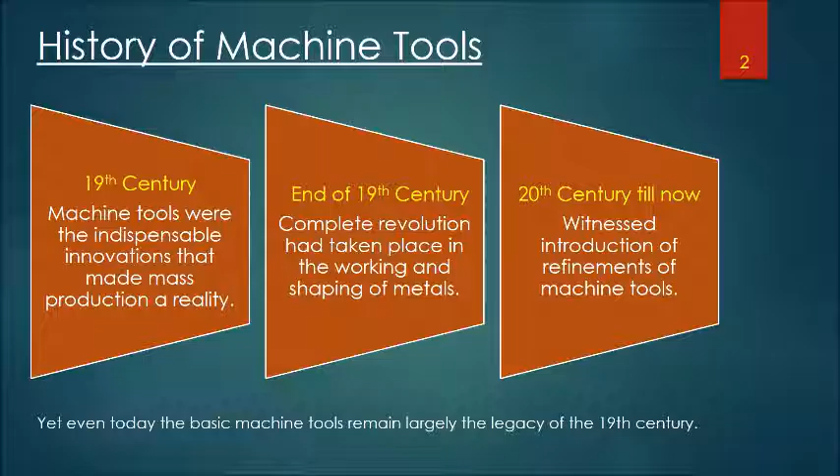In the 19th century, machine tools were the indispensable innovations that made mass production a reality the way it is right now. By the end of the 19th century, a complete revolution had taken place in the working and shaping of these metals. From the end of the 19th century through the 20th century until now, we have witnessed refinement in the industry. Yet even today, the basic machine tool remains largely the legacy of what we had manufactured in the 19th century.

Currently, the best sustainability practices followed in machine tool industries in our country, India. Current scenario: India's machine tool industry is taking steps to improve productivity and sustainability. The Indian machines are price competitive and also hold an edge in flexibility.

The sustainability practice in India is focused on a few points: energy efficiency, capacity enhancement, process optimization, scrap reduction, quality management, emission reduction, safety features incorporation, and work environment improvement.

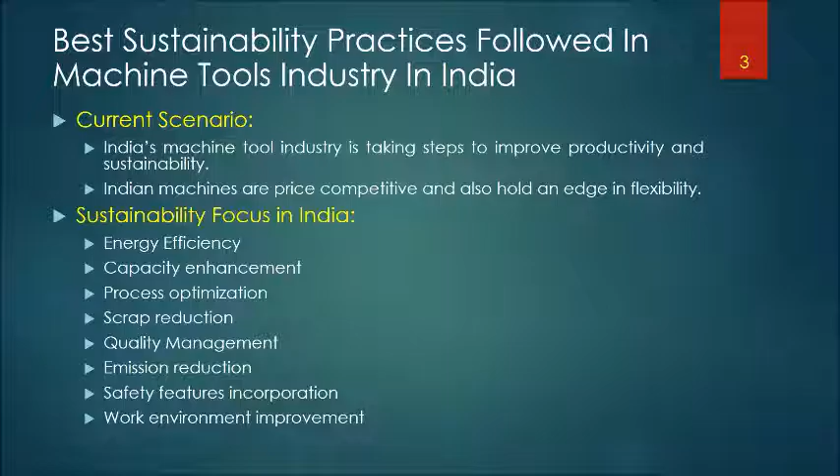So now we move on to the key challenges and the possible improvement points. First, research and development and technology denial. India needs to focus on research to have innovative methods of production and improve aspects of sustainability.

Dependence on import and high import duty: India imports nearly 70% of its demand. So this is an opportunity for India to manufacture these machine tools within its own country.

High interest rates make this industry less competitive. And green manufacturing and sustenance - this aspect has not been implemented in the Indian manufacturing industry.

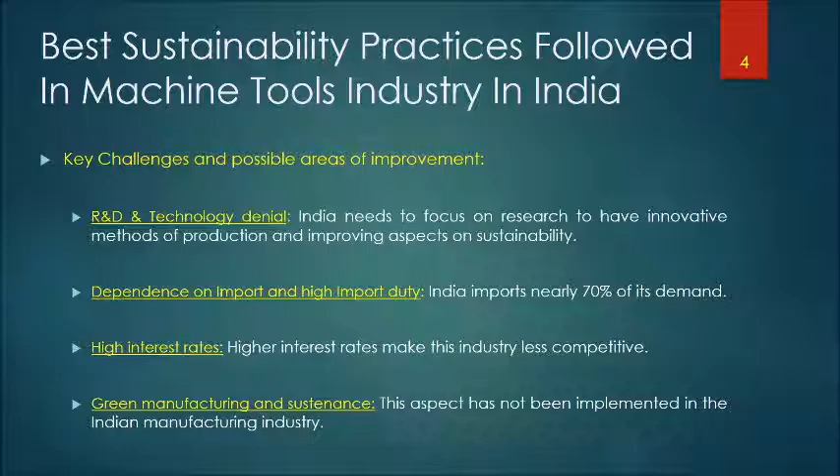Now we will look at best sustainability practices followed in the machine tool industry in India. The Indian Machine Tool Manufacturers Association is concentrating on some exclusive programs for enhancing industry capabilities in the manufacturing sector. In association with the Department of Heavy Industry, Government of India, it has launched two programs to enhance the competitiveness of the Indian machine tool industry.

Firstly, development through the Center of Excellence is an opportunity to develop new technology. The Indian Institute of Technology, Madras, has been identified as the nodal agency for the Center of Excellence in Machine Tool and Production Technology. For projects approved under this program, 80% of the development cost will be incurred by the Center of Excellence, and only 20% cost will be incurred by the industry.

According to this program, which is the Institute Innovation Collaboration Program, the mapping of industries with the R&D facilities available in the institutes will be done together.

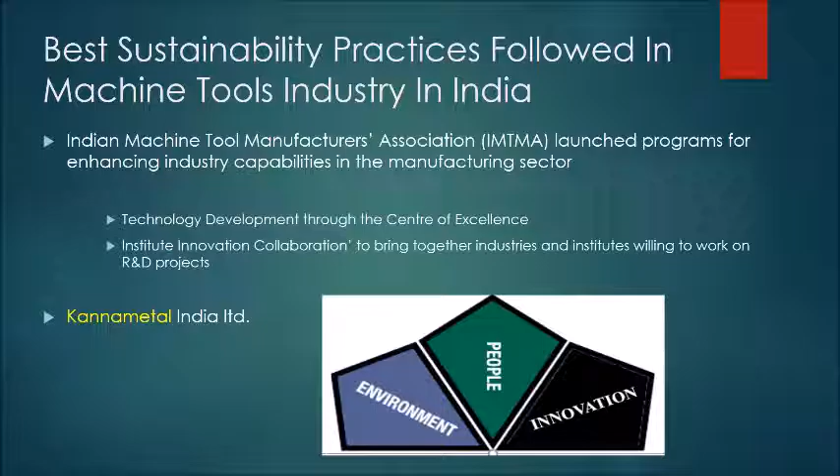The next initiative we will talk about is from the industry perspective. The company Kennametal India Limited, a leading machine tool manufacturer in India, has adopted a framework which includes environment, people and innovation.

Under their environment facet, they have started the Protecting Our Planet initiative, according to which they recognize and reward their employees in the area of energy and water conservation. At this point in time, they have done more than 100 global projects in this area.

Under the people domain, they have started a global management-based safety process, which has increased the safety of their distribution centers and manufacturing employees up to 100%.

The next area is innovation. Innovative companies such as Kennametal focus on the percentage of revenue from new products, and Kennametal has benchmarked its revenue from new products up to 40%.

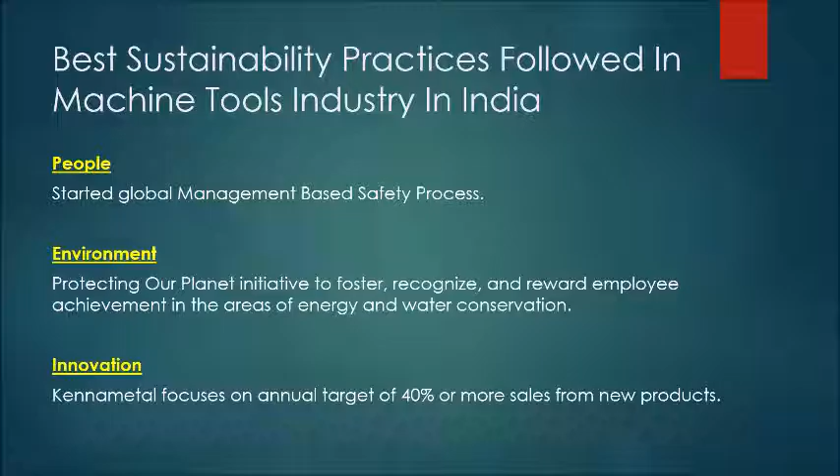Now from this slide, we'll talk about the best sustainability practices that are followed by machine tool industries across different geographies. First, we'll concentrate on Europe. In Europe, there is a project called Design MTS, where all the machine tool industries share best practices, and it is available for public use for all industries. The best energy efficient techniques are shared, giving all industries a chance to follow this technology and become more energy efficient and sustainable.

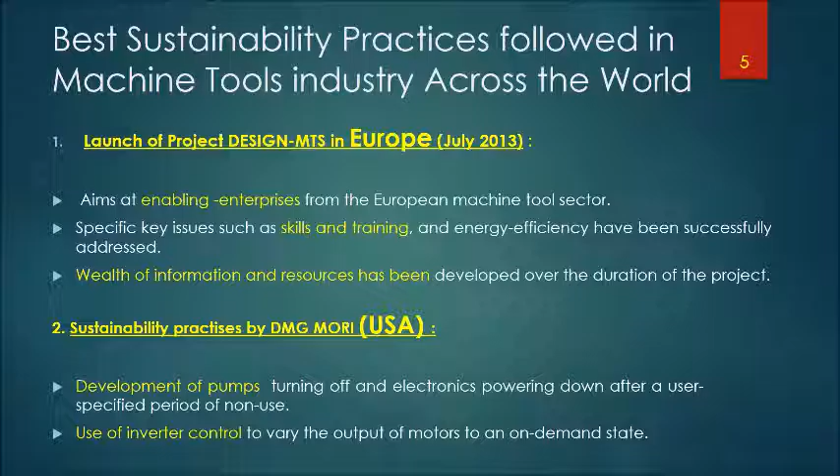Next is an example from the USA. We researched a company called DMG Mori. It has developed a research facility in California where they develop energy efficient machine tools. For example, they develop pumps or inverter controls that switch off or reduce power consumption when not in use, increasing overall machine tool efficiency and sustainability.

The third country we researched is Japan. We looked at the company Amada, and the main sustainability practices they followed were: first, they used material flow cost accounting, which helped eliminate wasteful resource consumption. Second, they focused on waste management and reduction techniques, developing roadmaps to decrease emissions and eventually become zero emission factories. Finally, they used alkaline water, which reduced waste produced and increased the shelf life of machines.

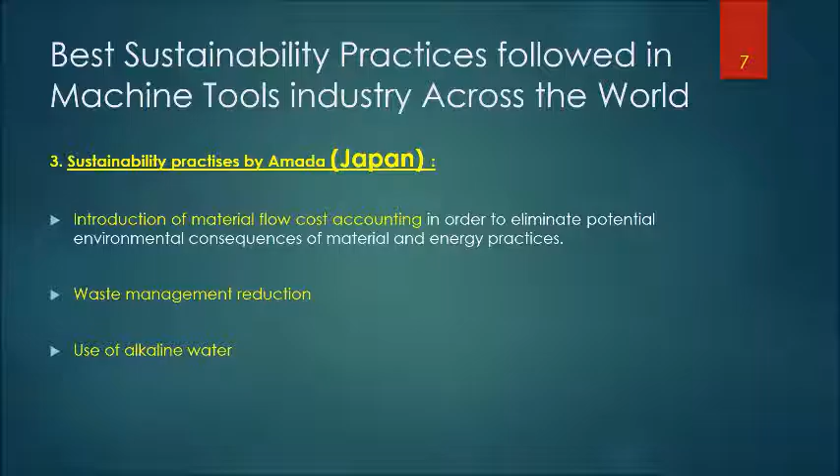Now we'll look at the ways and methods industries should incorporate to become more sustainable. First is boundaries of analysis. Currently, there are 4 main parameters industries consider to be more profitable: flexibility, quality, time and cost. To become more sustainable, they have to consider one more parameter, sustainability, and keep it at the apex. This means that even in times of recession, they must not cut the cost of sustainability. So there must be 5 parameters: sustainability, cost, flexibility, quality and time.

Next, they have to become energy efficient at the manufacturing system level. This means becoming sustainable across 6 main parameters: they have to prevent extra usage, reduce the usage of natural resources, reuse resources, recycle resources, and recover and dispose of them. This is the waste hierarchy model that they have to employ in their systems and practices.